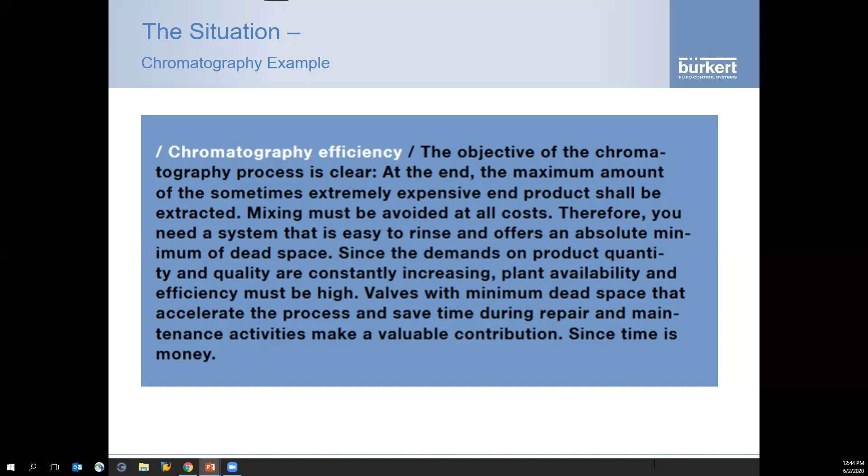Facilities are being challenged, generally speaking, to do more with fewer resources and less space. Do more with less. Who hasn't heard that, really? And this is a really good example, chromatography, of a really critical process and how you can maybe think about it a little bit differently to get a better result for your customers and ultimately the patient.

So if we follow this PFD, we can see that fermentation and other upstream processes feed into cell harvest, product separation, and then into a chromatography step, which is followed by some filling, probably some filtration, I would presume, and then product fill and finish into vials or some such packaging.

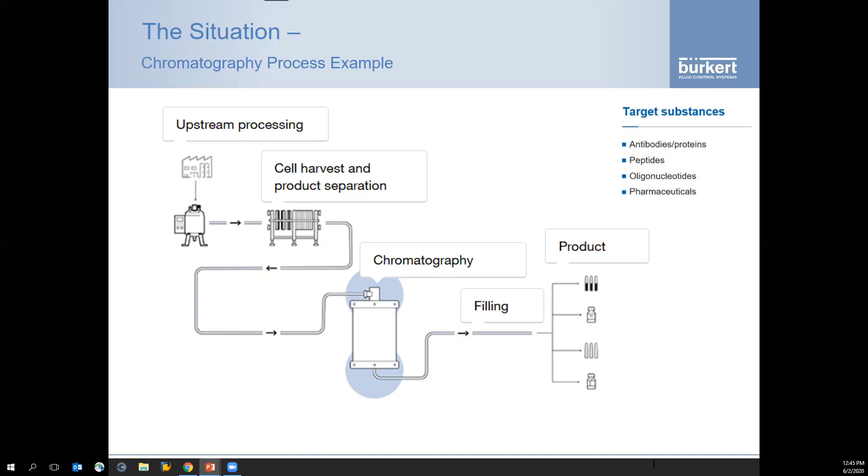And the target substances, the things that you're looking for, are your antibodies, your peptides, your oligonucleotides, and your basic pharmaceuticals, protein-based, things of immunoboosters. These are the things that you're really trying to capture typically with a chromatography process.

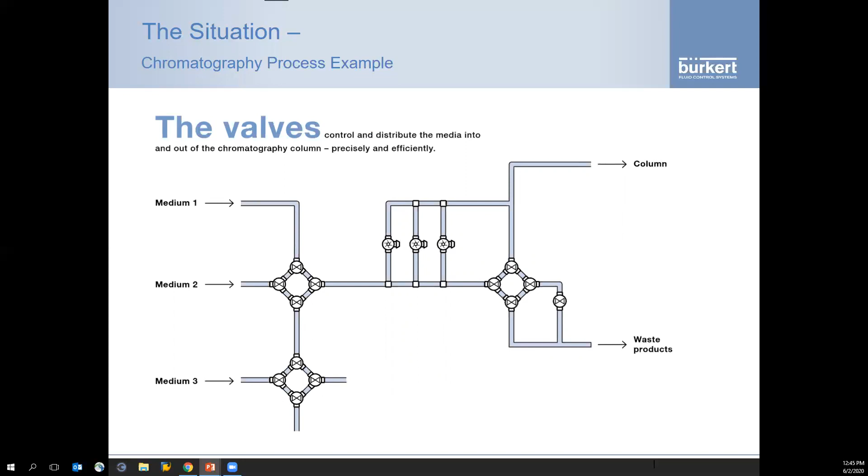So in a chromatography process example, you would have multiple buffers that would feed in. So we've listed them here as mediums. They would feed into a chromatography manifold that would separate from the process to a waste product depending on the conductivity spikes in the process. Multiple buffers may be introduced to the process, which then goes through the chrome columns. It basically separates the good from the bad, as to not overcomplicate it.

So if we were to look at the heart of that system, which is known as a chromatography cluster or a chrome block, in the traditional approach in the 1990s, this would be very common. You would see 4 valves basically fabricated together to form a cross or a T. And this would be made by welding 4 different two-way valves together.

If we then take a simple example and put some numbers to this, and we say, okay, what if that product has an inherent value of 1,000 euros per milliliter? That the holdup volume, the amount of liquid that's trapped between the weirs in a static condition, would equate to 90 milliliters. So again, an easy calculation, easy figures. $90,000 of product could potentially be held up as dead volume between the weirs following any step of the chromatography process. So that could be lost.

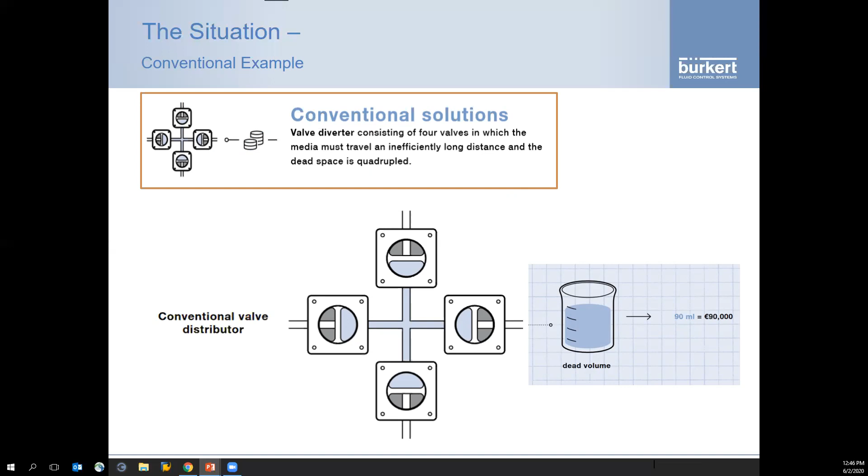And this is in addition to cleaning concerns and other pre and post processing optimization issues, so flow path characteristics and so forth. So this is the way it had been done for years. Then in the 90s, the industry evolved to a conventional block. So then we start to look at a machined block of metal that is machined with industry compliant material, ASME BPE typically, but in other countries it could be different standards.

The holdup volume that would be present between the weirs in a static condition equates to about 53 milliliters in this example, which would calculate to a direct cost of 53,000 euros of potential dead volume between the weirs, so wasted product in each step of the process. That's aside from cleaning and flow characteristics, but with a block valve, another variable that gets thrown at you is the ability to sanitize, to do a SIP process.

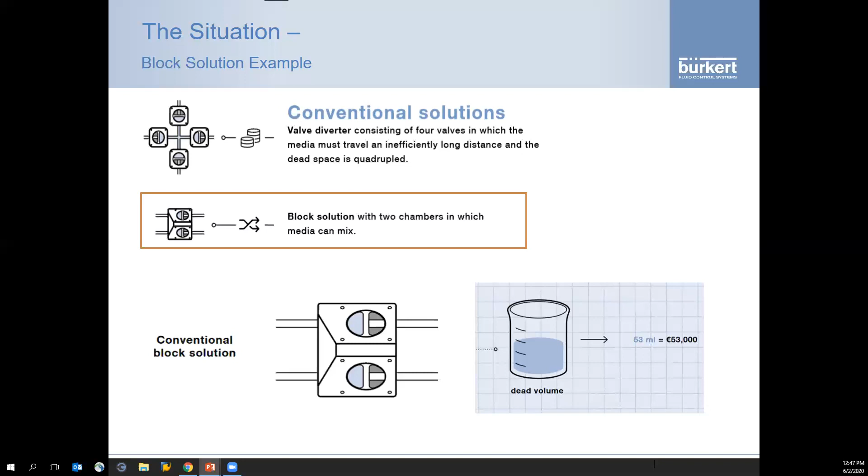Getting a temperature of 121 degrees Celsius for 20 minutes becomes exceptionally difficult when you have a giant piece of metal that effectively becomes a heat sink. So there's that to figure and consider as well, and maybe the stress on auxiliary systems that are farther from the coldest point in the system, which is typically the chrome block. But a straight up cost there, 53,000 euros, is pretty common.

So from our perspective, we said, all right, well, how do we look at this from a different angle? Could we get smarter about machining the weirs? Could we somehow pitch them or angle them? Yeah, we could do that. Or we can maybe think about technology that we purchased before in the 1990s. This was made for this. How do we take the lessons we've learned?

How do we apply that information that we've gathered, that data that we've accumulated over the years, and really apply it to this problem? So what we said, all right, well, we did some research with our A&Es, our OEMs, our end user customers, and we said, all right, how do we take all this information and innovate our block valve design? How do we somehow approach this from a different perspective?

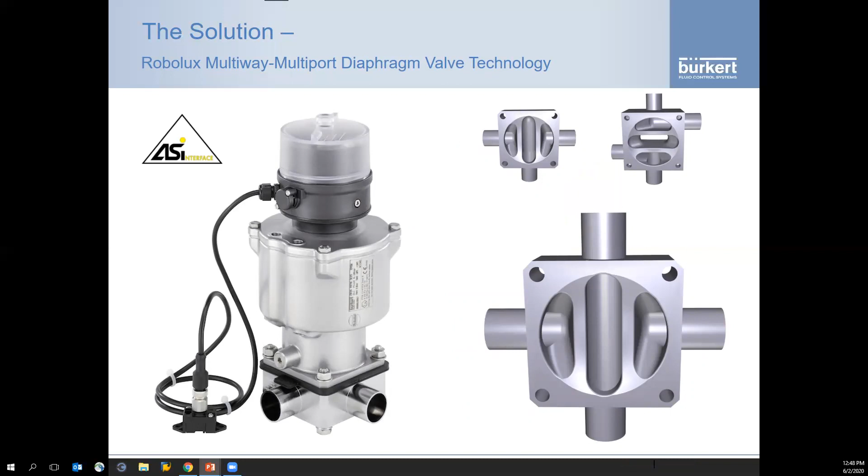So when we applied this Robolux technology to a standard block, we started to really see some interesting developments. In addition to a smoother flow profile, you also get drastically reduced raw metal, which means the heat up and cool down times are significantly reduced. And on top of that, we are able to integrate some level of Industry 4.0 automation, so an AS-i interface, and apply this either in a centralized, distributed, or decentralized automation model.

And the next bit that got really interesting for us is globally, we see a push for higher concentration buffers. So hotter processes, but more aggressive processes, meaning that chromatography systems built in AL6XN, Hastelloy, 1.4429 are becoming more and more common. So as you reduce the cost of that metal, then you reduce the cost of the piping that attaches to it. So it becomes really, really interesting to our customers when they say, okay, not only is it more cost effective, it flows better, and it's much smarter from many perspectives. But probably the one that hits home the most is the holdup volume.

The reduction of holdup volume, with a similar case study to the one we talked about earlier, drops to 22 milliliters. So a total cost of 22,000 euros using that same €1,000 per milliliter example. And depending on which system you're going from, either a traditional cross or a block solution, that can be half to 4 times less holdup volume in that system, in addition to the smoother flow profile and the ability to not heat sink, to not become a giant radiator block. So that really helps improve the process, reduce manufacturing time, but also straight up cost in terms of dead volume.

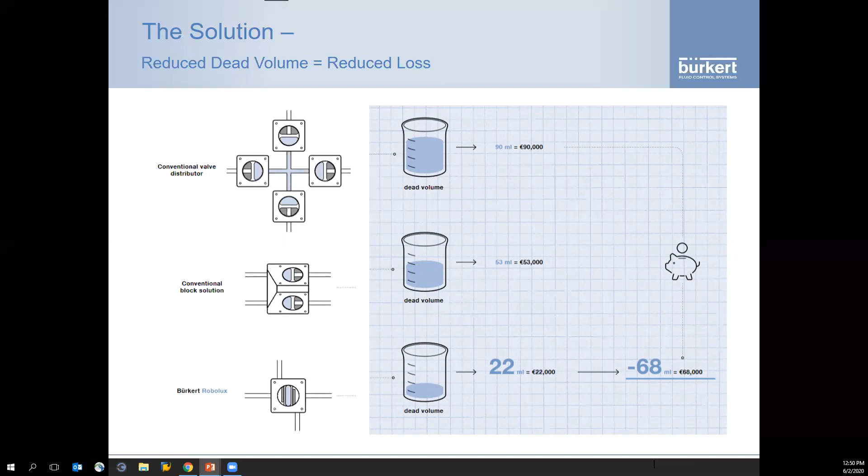As an ancillary benefit, and honestly one that wasn't top of mind, it reduces the overall footprint of the valve assembly itself. So going from a cross, you can see that it takes up a fair amount of space, and that's not counting the mechanical and the utilities to get to that, so cable trays and the like. Then you look at, okay, what if we take that and move it into a block, so we reduce that mechanically, we get a nice design that reduces it a little bit, but not terribly so. It still takes up a pretty significant amount of space in that UFO type layout.

But then when we move to a Robolux design and go to a back-to-back solution, it's extremely compact, which means that the entire skid in some cases can shrink. And that becomes really cool.

And it's interesting, the feedback we get the most from our clients is that they didn't know this was even possible and this technology existed. So it became difficult for them to wrap their head around the flow path. And that's a direct quote from a good friend, a client in the industry, an end user customer. He said, once I got my head around the flow path and how this worked in an extra axis, I really started to see how this could benefit the overall process design and really reduce the risk in my system.

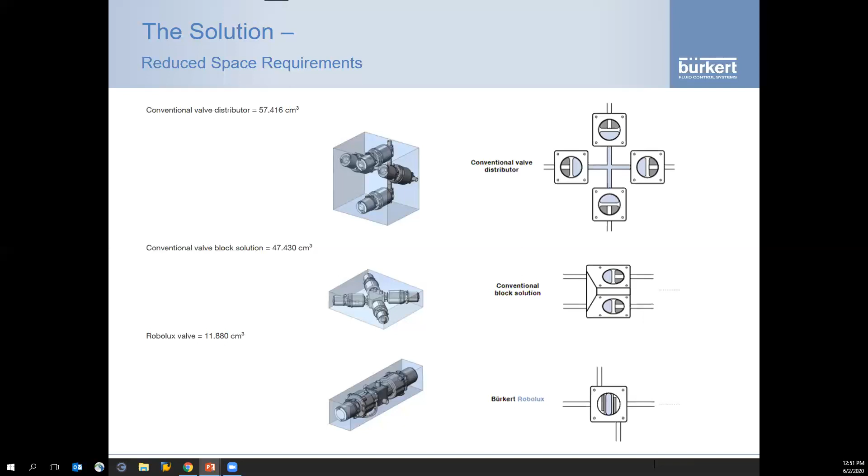Another ancillary benefit, which is kind of obvious, but honestly those things often get overlooked. Just from a pure maintenance perspective, the handling costs and carrying costs of consumable spares are reduced by half because you've effectively got a 2-in-1 actuator. So as you can probably piece together on your own, if you look at that assembly, instead of going from 1 block to 2 blocks, in addition to my entry time, my logistics, so an overall time requirement, you're looking at a savings of about 12 hours. So in most operating environments, a day and a half, not counting gowning and all these other sorts of things. So real, definite, straight up cost savings in terms of reduction of maintenance, training of teams and so forth. So really interesting when it comes to that.

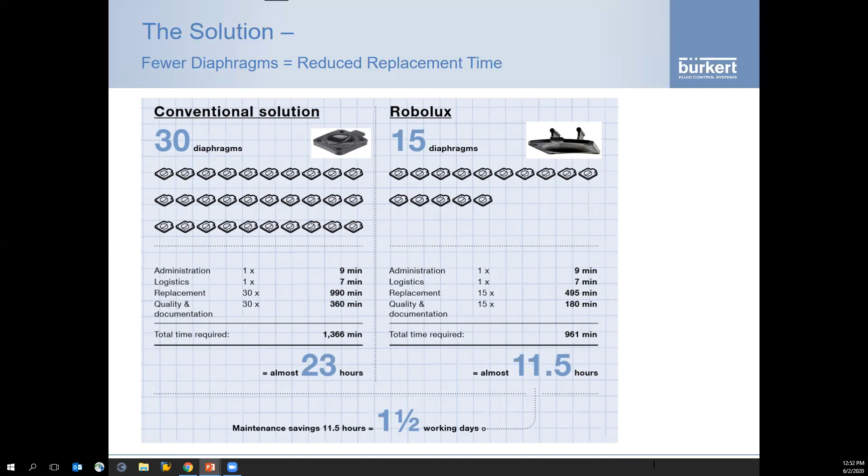And how does all this technology roll in? How does it apply? Well, here's a really good example. We've had a number of customers use this technology to give them a differentiator in the market, something that really translates into value for their end user customers. One really good example is YMC, who not only changed to Robolux designs for the harder systems, those Chrome blocks, but they also applied a continuous processing model and some really clever Pharma 4.0, Industry 4.0 programming to their systems on top of that.

And this makes for not only a really technologically advanced system, but something that really helps the customers push the envelope in terms of higher titers and the overall attractiveness of their facility, which you wouldn't think is important, but when you speak to CMOs and CDMOs, the plant floor is actually a sales tool for them, because let's face it, everyone wants their pharmaceutical products to be made in a nice, clean, good-looking environment. When you walk in and see a system like this that produces 2 to 4 times as much as a traditional system just by being clever with technology, that's really cool. That's someone you want to give a contract to.

So these systems can run in either a parallel mode or continuous mode. And again, the team from YMC, there's a hyperlink there. You can connect with them and they can explain in a bit more detail. But essentially what you're doing is going from a batch process to continuous processing or parallel mode, to either double up on the volume or to go to a continuous 100% uptime model, which is really interesting for any chromatography process, which is often the bottleneck of the entire manufacturing steps, aside from the obvious fermentation.

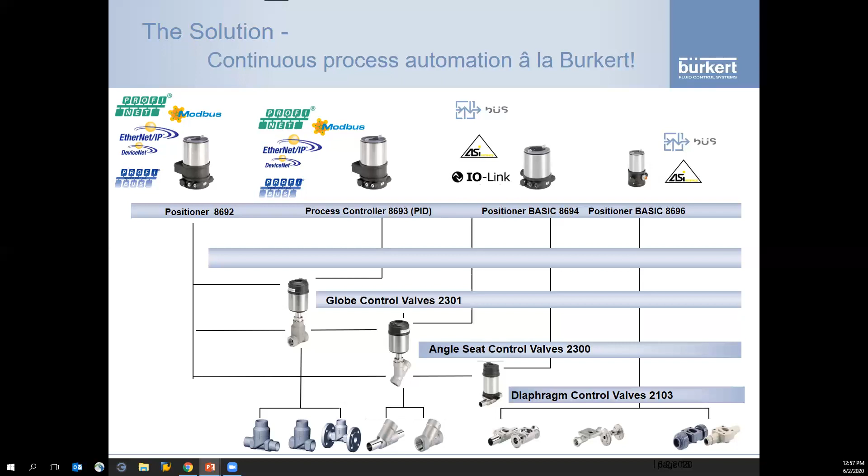So to wrap up and summarize, we went through a lot of information today. That was a lot in a very short time, but I want to be respectful of your time. Myself and the team at Burkert felt this was enough information to act as a bit of a teaser for our academies.